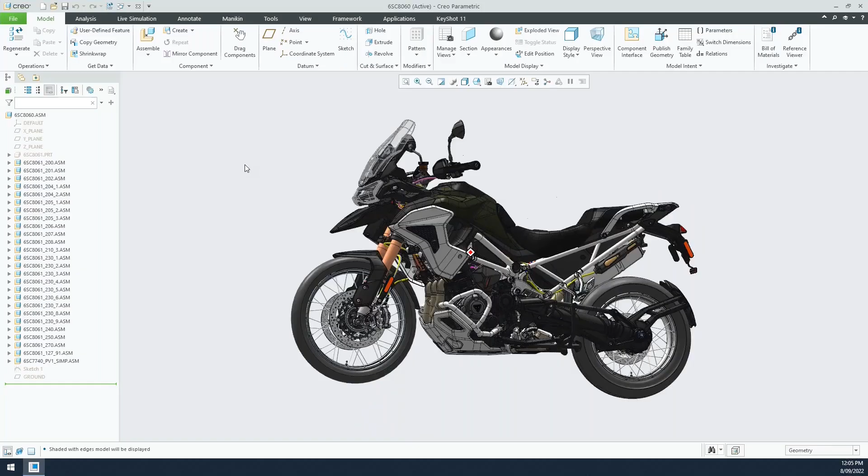So here's our Triumph motorbike running Creo 9. It looks very much like Creo 8 and previous versions before it. Not really too much that's obviously different to tell you that.

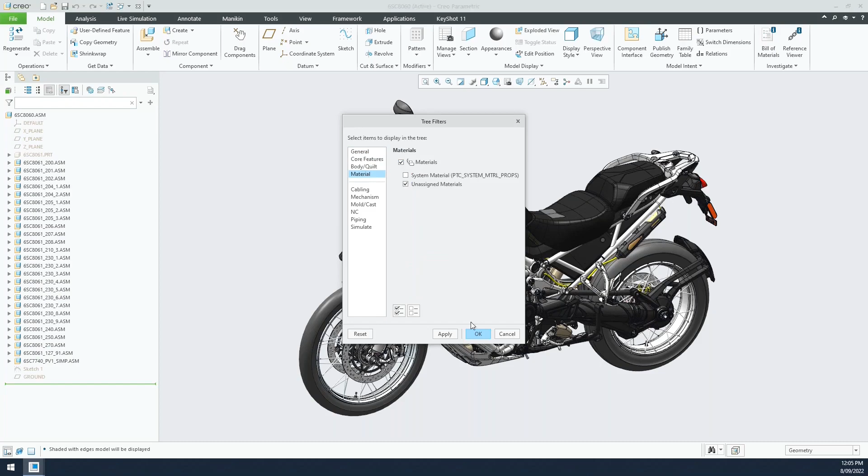One of the main changes is around the model tree. As I mentioned before, it had more toolbars, or icons, in the model tree. So I can click on that to get to my tree filters. They've updated the display in terms of what columns I want to show. It's showing the layer tree, which has got its own icon there. I can drag them out as well, put them side by side, bring it out into a separate window, stack it at the top or bottom, all these sorts of tools. Some of these were there inside Creo 8 if you haven't seen them before. It's also showing my other tree, I'll come back to that one in a little bit.

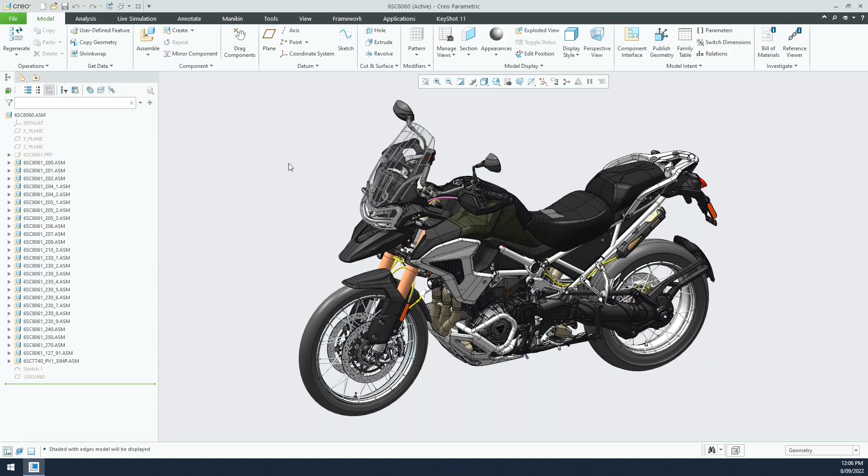Okay, so working with those inside Creo. Some other things worth mentioning as well.

If you're working with multiple screens, this was introduced back in Creo 8. I've got Creo set up to start automatically on my second screen. By default, Creo always starts on your primary screen, and then you have to drag the window across to your secondary screen, and if you open a new window, it goes back to the primary screen. So there's a new config pro option introduced back in Creo 8 to let you force Creo to always start on your second or third screen, or however many you've got, which is very nice for those working with multiple monitors who don't want it on the primary screen all the time.

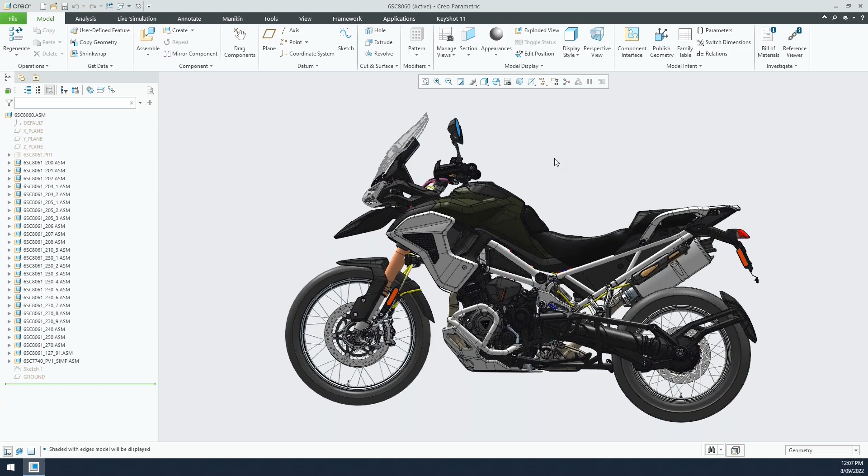That I was talking about with my arrow keys - if I hold down shift and click on the arrows on my keyboard here, then I can rotate the model around in 15-degree increments like so.

Nice option there if you want. I use a 3Dconnexion device - you can see I'm just spinning and moving all in one go, but that's there. All of these things you can get into in the options. If I go to my model display, there's my rotation angle, I can set that up as well.

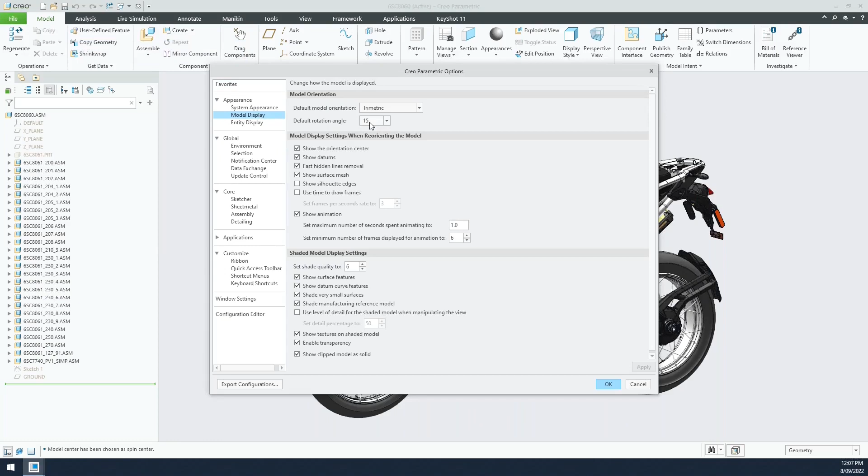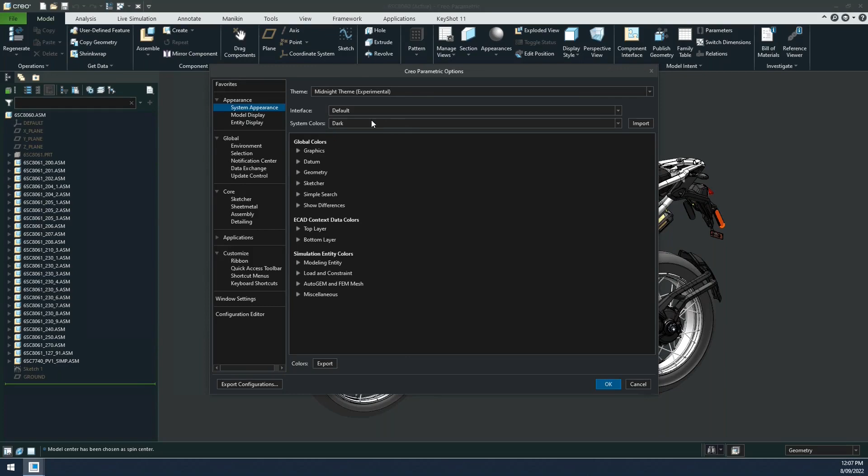Another one worth mentioning - themes. Creo's had a dark theme in there for a while, but it's not really a dark theme, it's more the graphics area. So there's a new midnight theme, which is actually more of a true dark theme for those who like working that way, since we've all been working in our dark little caves at home during COVID. So there's a proper dark theme there now, which is quite nice for those working that way with 9.

Okay, so let's have a look at some of the other bits and pieces here inside Creo 9. I'm going to go and open up - actually, I'll show my favorite one first. I'm going to create a new part, and this is the new auto scale of a sketch.

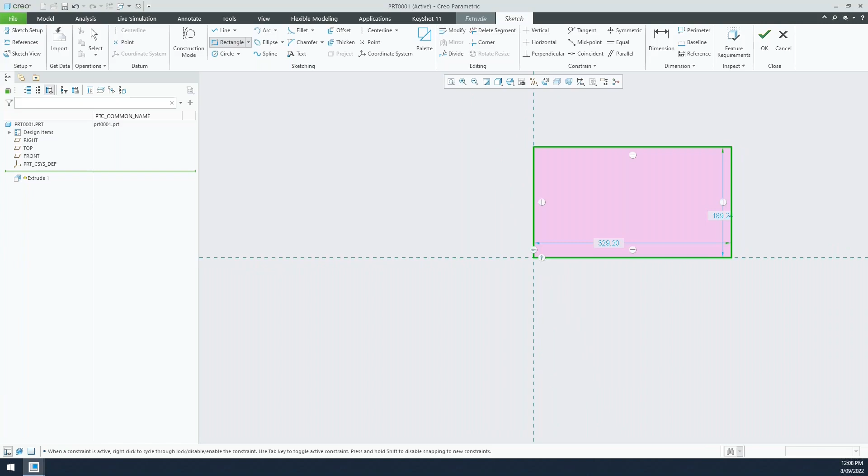I'll just do an extrude on here. I'll switch to my sketching plane and sketch a rectangle. You can see it's 330 by 190, based on the default size of the template. I didn't have any geometry there, so I just kind of took a guess and sketched it. But maybe this should be 30 and this should be 20.

In old Creo, when I modified that to 30, that dimension would shrink but the height would stay the same. Now inside Creo 9, when I hit enter on that, it's actually scaled all of the other dimensions in the sketch to keep that sketch the same scale, which is really nice.

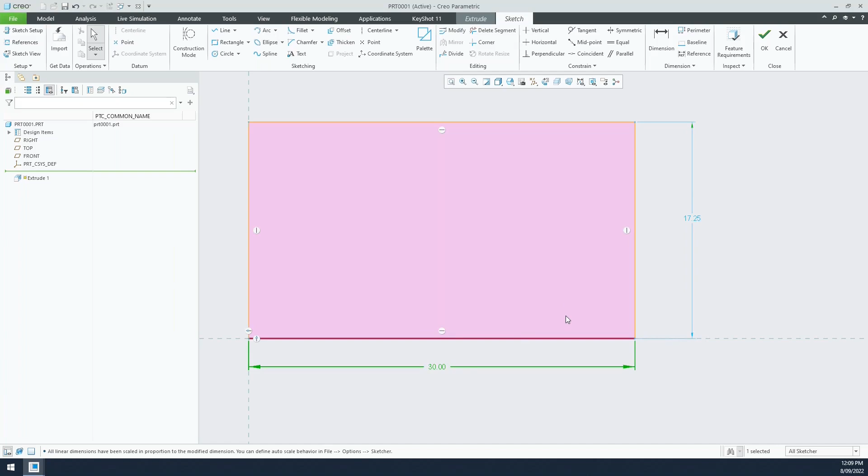You can do that the old way - you pick all the dimensions and use the modify tool, you get the little thing come up that you would click on to lock the scale. You can do it that way, but now it just does that automatically, so I can scale the entire sketch very quickly and easily.

The other one, this was introduced back in Creo 7 actually - you can see how now the default depth is basically to the same scale as the sketch. Earlier, those using earlier builds of Creo might have seen this before, where you do a little sketch and then the default depth of that extrude is like 300 or 500 or something.

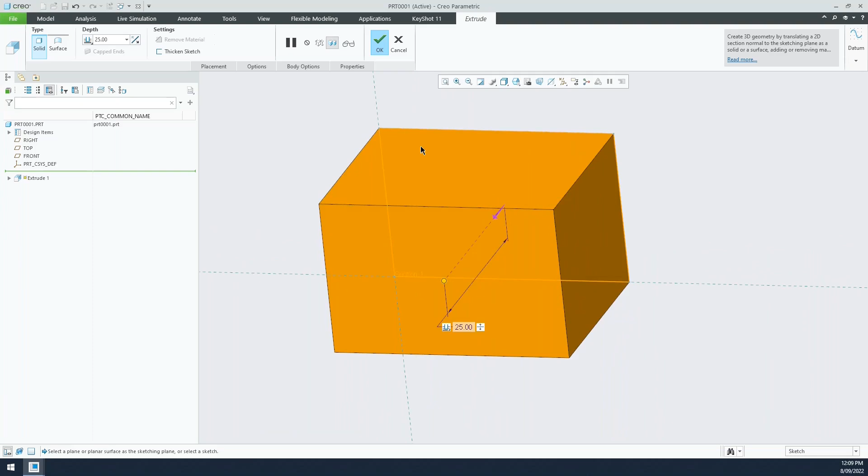It's massively too big, so you have to zoom out to see it and change the dimension. That was introduced back in Creo 7, where it would automatically scale the depth to match the scale of the sketch as well. Now everything sort of stays in the area there.

So some other bits and pieces - if I go into Sketcher to create a sketch here, I go to my sketch view. The project tool again uses a new UI, so I can pick on my line, hold down the shift key, and pick my loop edges. I can go in and see the options I've used to define that. If I had more to do, I could apply that and move on to another one, but I've picked all the edges available in this example, so I'll leave it like so - there's my sketch entities.

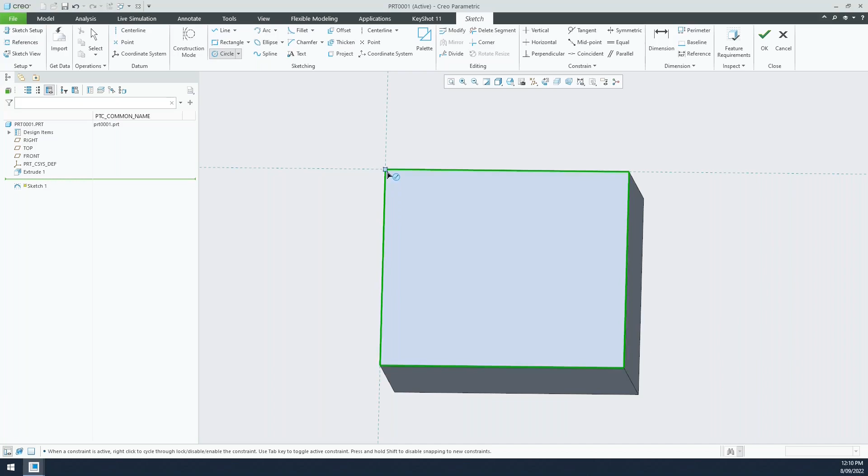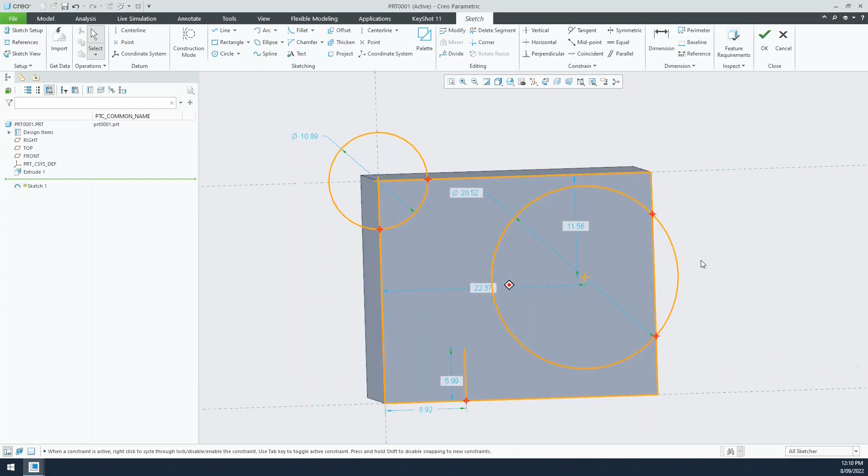If I create some other entities inside my sketch, just to show this - let's put another line on just here. For my highlighting of options, I've got endpoints, but the new options I've got are intersections or junctions. You can highlight those as well inside my sketch, so I can see them there. This is something to help me troubleshoot sketches - if I've done something wrong that can cause issues with certain features, I can clearly highlight those before I get into that problem.

Let's look at something else now, some of the part modeling stuff. Let's get this guy - here's my part model. Let me just turn off the extra column there.

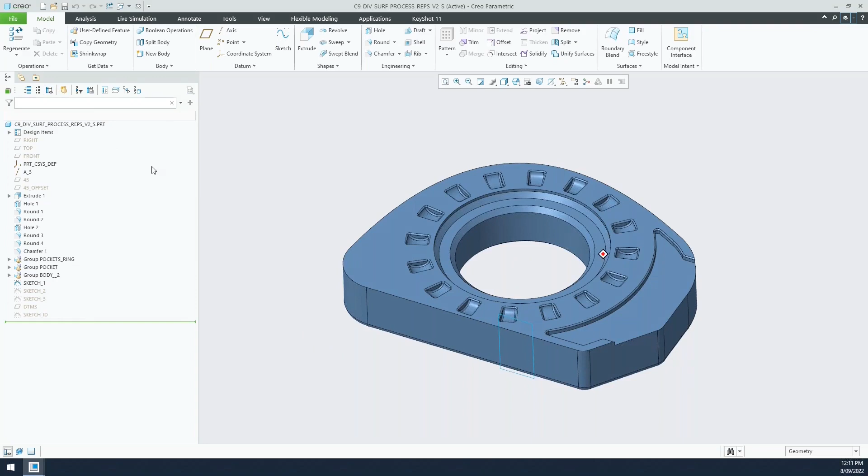So some of the other tools I was talking about - the ability to look at the evolution tree here, the quilted body evolution tree. So there's all my features there. When I pick on these guys, I can see the feature. If I turn on my select related tree, when I pick on this feature, it shows me all of its parents and all of its children, so I can very quickly see what's going on here. It's a nice new tool that's there.

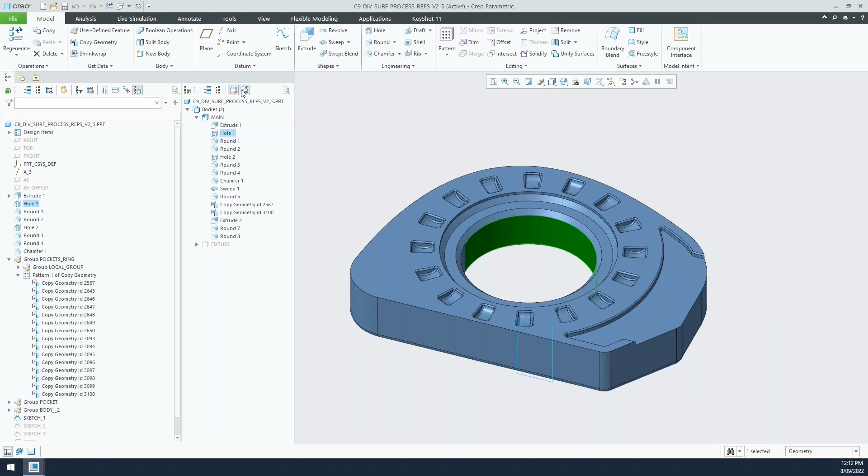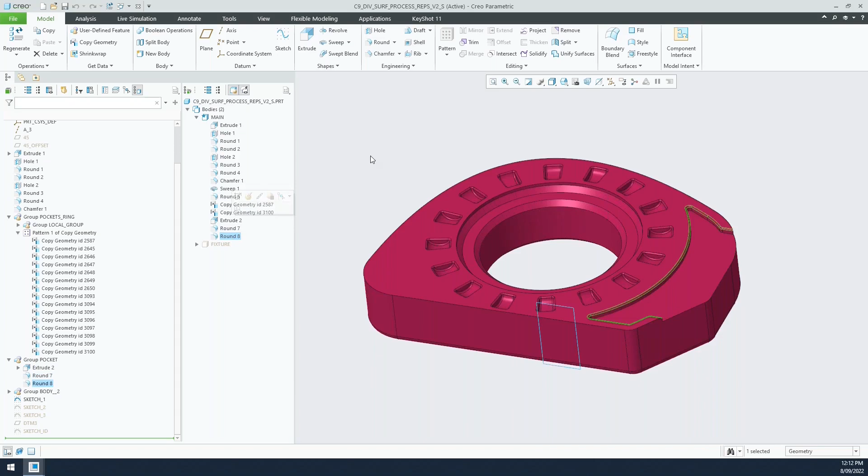With my snapshot here, if I pick on features inside this tree, when I pick on the extrude, you can see it shows me what that solid feature looked like when it was built. That's my snapshot preview, and then the hole, and then the round, and all the other bits and pieces - my surface geometry and everything else. It's a nice way of being able to study and work out how that model was built while I was doing it. You can turn off the snapshot if you want, so it doesn't show it, but it's a nice new tool that's there - a bit of an expansion on what came inside Creo 8.

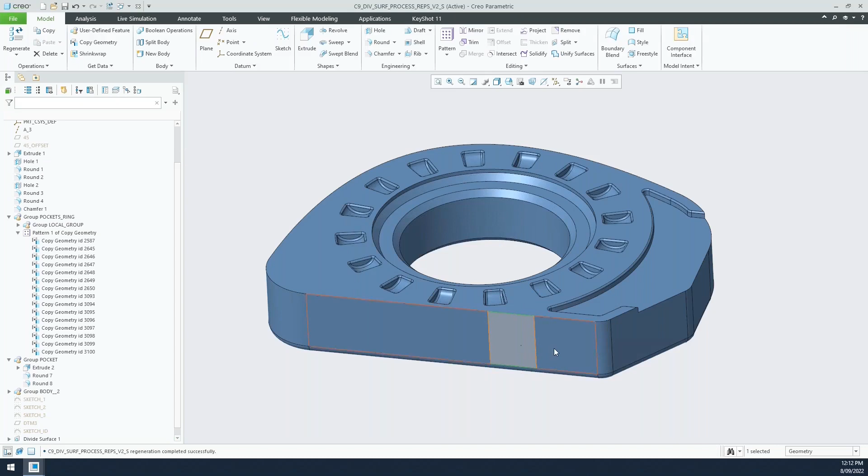The divide surfaces - let's show that one real quick. The idea is that I can take some geometry and use that to divide a surface. Let's say that surface there, I can flip which side I divide, and I've now got two different surfaces to apply colors or whatever else it might be to. I can pick annotations, whatever it might be.

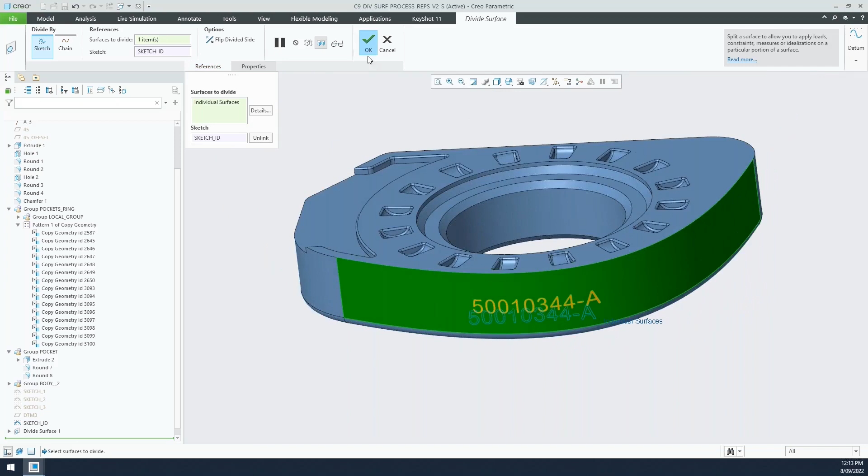Another one here, let's just show my sketch. I'm going to take that sketch, again split onto that surface. I project that surface down on there, and again splits that surface up into two surfaces, which I could then go to maybe flexible modeling and do an offset on that. Let's pick on that surface, give it 2 - might be a bit too big, like so. And I can offset that out, like so. That was really quick.

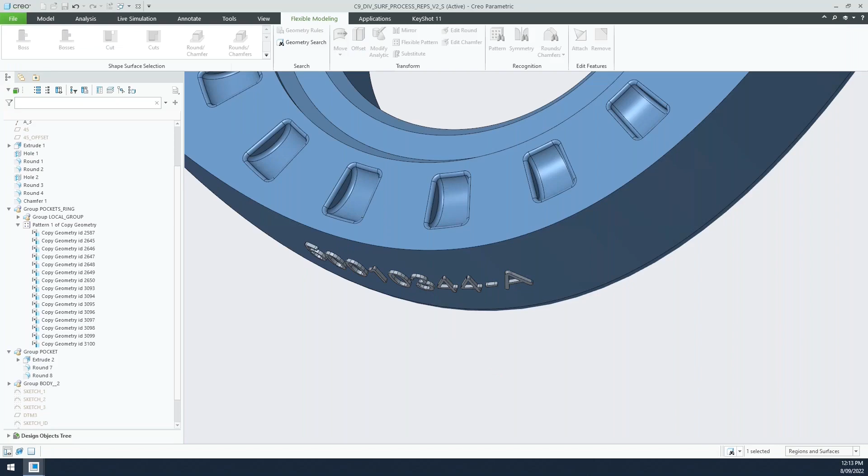The beauty of that is I picked minimal references, right? So you could construct that using surfaces and trims and things like that, but the issue is what if this is, in this case, parameter driven? If I go to my parameters, there's the ID for the engraving. I might change that to C - the sketch updates, all the other bits and pieces update, and the feature updates as well. So a really nice way there of using the divide surfaces.

All right, so that's some of the stuff that's there inside core modeling. But let's press on, because there's plenty more to talk about inside Creo 9.